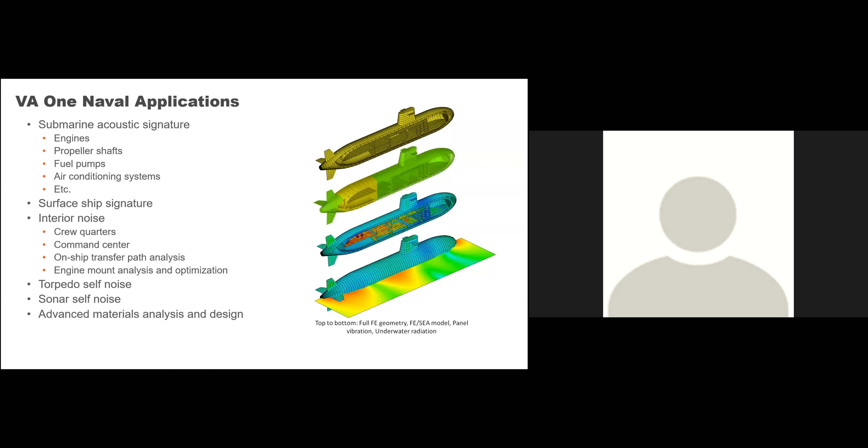As for naval applications, here we see more challenges and tasks. We deal with internal noises and the system of noise and sound insulation for different compartments, sound insulation for air conditioning systems and air ducts, but we also add tasks related to naval products, such as acoustic signatures of engines, rotors, and turbines. This is the surface signature of the ship, and also the possibility to identify this ship at a distance. So we reduce noises, and we also reduce its general signature.

How can we solve the task of calculating acoustics inside the ship? First of all, we need to have the finite element model or CAD model. If we do not have such a model, inside our software we have a special marine modeler, which allows us to create CAD models based on deck drafts and cross-sections.

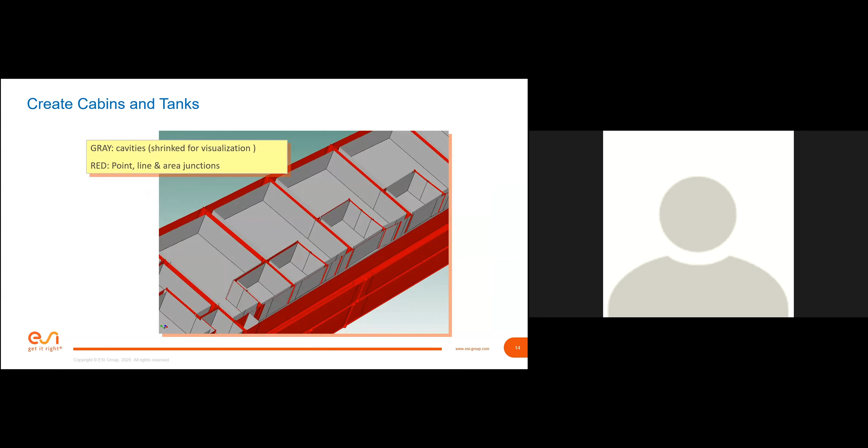These models can be uploaded in standard CAD formats. You can see what formats can be uploaded, and you can also upload a finite element model and use it for your analysis. Here you can see the division of the ship into different compartments and zones, with cavities shown in gray, and junctions and side walls shown in red.

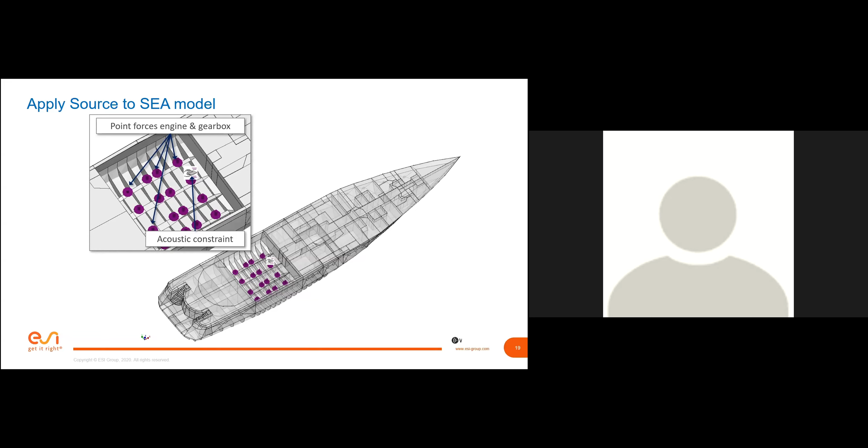We can have different options for the source. The main source is the engine, and to be able to model all the calculations, we need the finite element model of the engine support to understand how the noise will be transmitted. This finite element model is interpreted as point forces and acoustic constraints, and this energy is calculated on the structure of the ship.

We can take into account the water loading, which increases the mass of the ship. We consider water either as SIF, a semi-infinite space, or as just mass loading on specific zones of the outer skin of the ship.

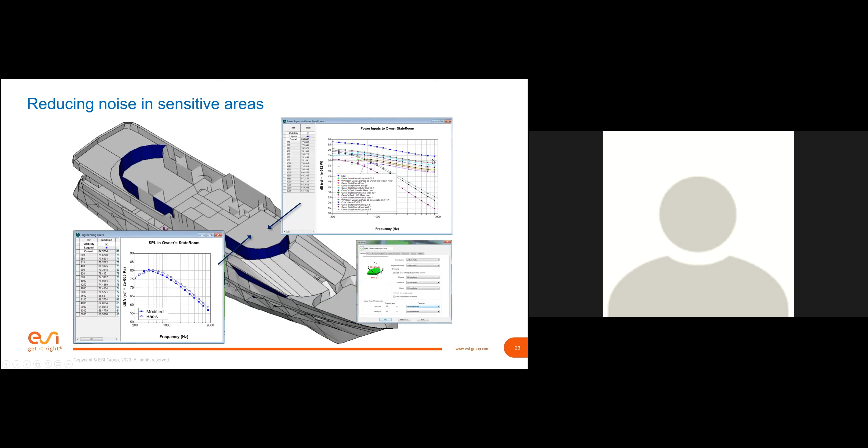The main task is to evaluate the paths of noise transmission and understand how the noise can go to the crew cabins, for example. The general level of noise is shown on the figure in blue, this blue line, and we also have different paths of transmission. So we analyze the most interesting paths of transmission, and they will be optimized afterwards.

We can optimize it with the use of noise-absorbing materials, or by increasing damping, or by increasing thickness. We can use different options of insulation materials, and we can just add insulation.

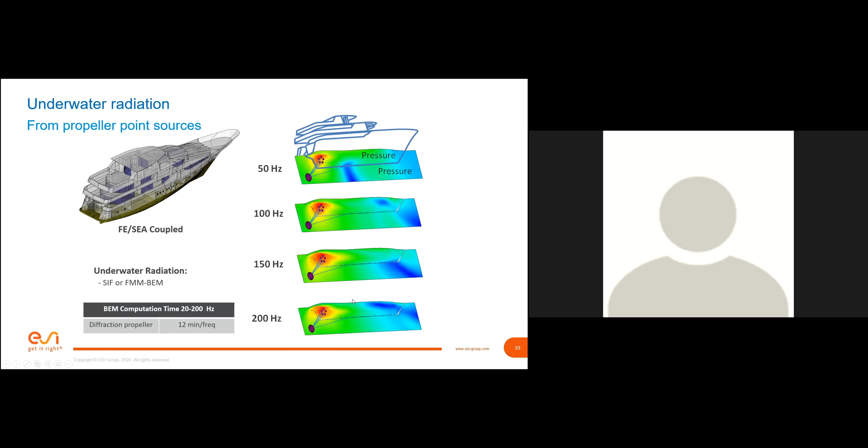This is the first part related to the internal noises. The second part is related to external noises. So from where we can transmit noises to the external environment. So first of all, this is the vibrating structure, the vibrating outer skin, and here we can analyze velocity and pressure under different frequencies. The second block is the screw, and locally we can analyze in each point what is the level of noise generated by the screw.

Except the determination of the noise level at a specific point, we can also look at the direction of this noise. So what will be the frequencies, the directions, and the distances of this noise transmission. And we also can evaluate with the help of the modal analysis how the structure will behave under different frequencies and how the noise will be transmitted at a certain distance.

And to conclude, I would like to show a number of clients which are using VA One solutions. It is used very actively in Europe, in the USA, in Asia. Our client in Russia is the Rubin company. They are manufacturing submarines. Well, unfortunately, their tasks and the details on their tasks are not available to us. If you want to receive additional information, you can contact them directly.

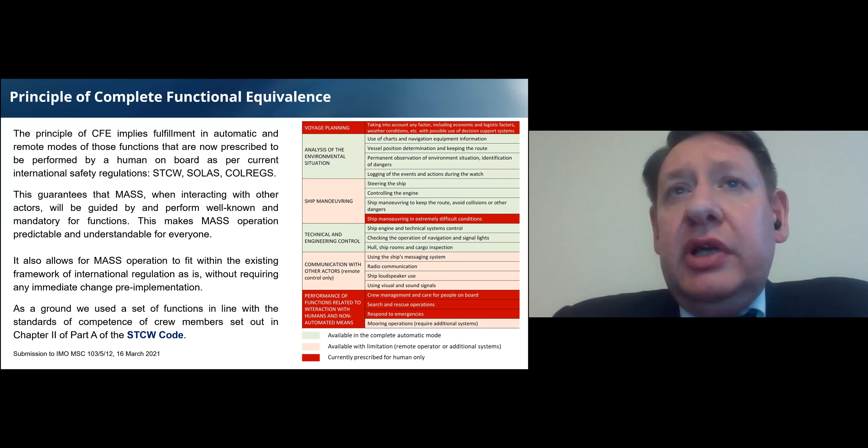On the one hand, this allows us to work within the existing safety regulation since we are compliant with its requirements. And on the other hand, it guarantees that an autonomous vessel interacting with other actors is guided by well-known and predictable rules and functions.

I will not go deep into regulatory. I would just say that we are actively working in the International Maritime Organization in the analysis and development of international regulations for MASS, and taking into account this work within the IMO, we have developed national regulation. This is the first in the world regulation for autonomous vessels. We have 3 levels. The first is a federal law explaining, interpreting legal aspects of maritime autonomous ships use.

The second is under law, including government regulations on the national experiment, which allow, as I said, to equip and to operate autonomous vessels under the Russian flag in commercial conditions. And the third level is technical regulation. First of all, these are recommendations by the Federal Agency of Maritime and River Transport on COLREGs application by maritime ships. Again, first time in the world, the Maritime Administration explained in clear algorithmic mathematical mode rules for collision avoidance.

Then we have also rules for classification of maritime autonomous ships and rules for cybersecurity issued last year by the Russian Maritime Register of Shipping. Also, as I said, we have developed a universal set of technical solutions. Universal means that we can apply it on any kind of vessel, and first of all on retrofit vessels. So we don't need any new type of vessel. We can upgrade the existing vessel to an autonomous one with this technology.

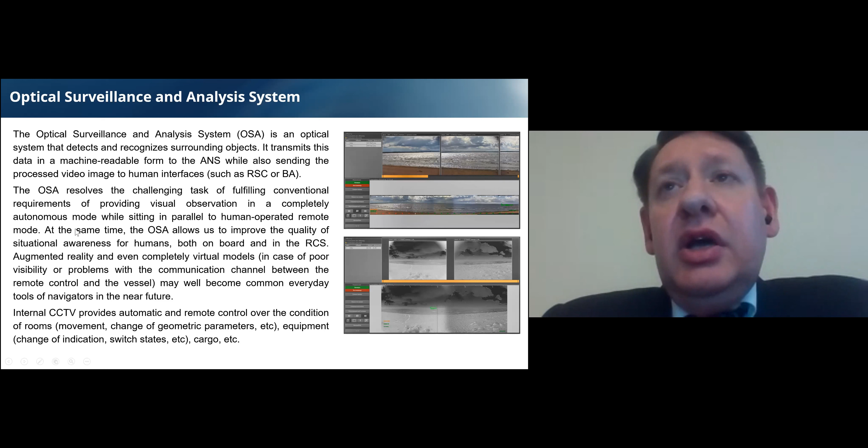The remote control station, you may see here again one of the video records of one of the trials in real commercial conditions, is something like the equivalent of a bridge, but outside the vessel. We have video screens representing the real-time video data with augmented reality, with metadata, which helps the remote operator to understand the objects around the vessel.

It has interfaces to all the systems, navigation systems, technical control systems, radio and messaging devices, and also a joystick system to directly control the vessel. In general, we are following an approach that different modes of control should be coexisting, the same as it was made during the MUNIN project, as well as described by the International Maritime Organization. So we are using the proper mode of control for the proper situation.

For example, in high seas, the system could work in standard situations absolutely automatically. In non-standard situations, it could be controlled by the remote operator, and in some limited cases, like pilotage, for example, it could be done by the crew on board.

Again, starting from September last year, after extensive simulations and tests in simulators, we started trial operation on board these 3 vessels. The first stage was just gathering and analysis of the data, so everything was working, but without access to actuators. In December, we got approval in principle by the Russian Maritime Register of Shipping, the first in the world approval in principle for autonomous navigation systems.

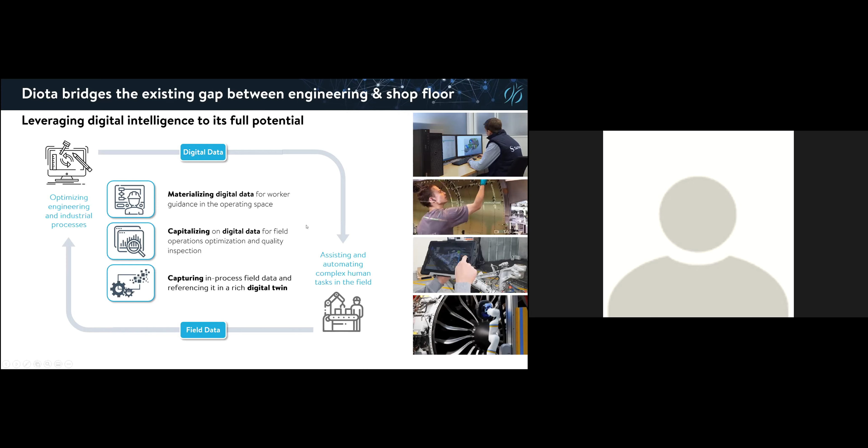With the solutions, we want to allow them to capture information during the different processes, to capture the field data and reference it with the digital information, the CAD models, the digital mockups, and other information to create rich digital twins that represent the reality on the shop floor, and provide this information back to the engineering so that the engineering can optimize their data and their industrial processes. That's the overall idea, and what it means is illustrated in this video.

Again, our solutions are particularly tailored for heavy industry and the data they use. We have a lot of experience in the maritime sector, but also the energy and aerospace sectors, providing very efficient solutions for the shop floor. First of all, we can connect to different information systems on the engineering side to allow engineers to use their complex CAD data or simulation data and visualize it with the right device in the right place at the right moment on the shop floor for the worker.

Here, the worker can see the interior of a cockpit through a head-mounted display. Or here, you can see how a worker in assembly is guided through a projection system to drill holes in this case, but we also use it to assist the assembly of bolts and rivets, not only in the aerospace industry, but also with different construction companies or naval companies.

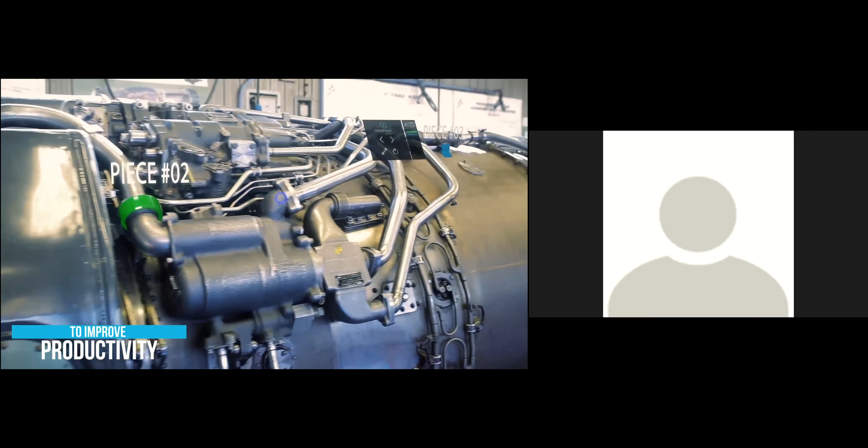Here is another example of a worker guided using a head-mounted display or a tablet during a maintenance operation on an engine, which is the engine of a helicopter, but this operation is very similar to operations with engines or complex equipment in the naval industry. And our solutions are also used for maintenance work on electrical components, for example.

Finally, the solutions are also very well suited for training purposes, to allow a faster skill ramp-up of workers on the shop floor with complex information. And at the end, all this data that is captured and acquired is particularly well adapted to be provided back to the engineering so that the process and data could be improved.

So here's an illustration of what I just described again. On the left side, we have the engineering department where all the data and procedures are developed and created. And on the right side, the field operations, which want to benefit from this data. And therefore, this data needs to be converted and manipulated.

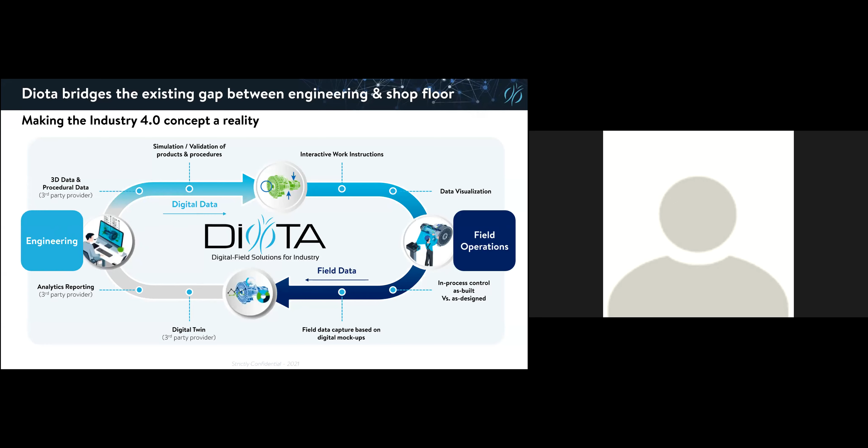Here a quick look into the different devices that our solutions support. So our software solutions are completely agnostic to the different devices, and this is because we want to provide the best suited device to the worker. So our software, the Diota player, can run on tablets, it can run on workstations, it can run on a projective system or a head-mounted display.

And this is because, for example, in a scenario where we want to assist a worker who's assembling equipment or assembling bolts or other parts, they usually want to have their hands free. And therefore, they do not want to hold a tablet or hold a camera. And so they can use a projective system to project the information, or they can use a head-mounted display to have the information immersively displayed to them while they have their hands free and can do their work.

However, for example, maintenance work, or quality inspectors especially, they prefer to use tablets, for example, or these cameras to be able to interact with the system, to obviously be guided with a step-by-step instruction, but also to be able to take notes, document, and to execute conformity checks and create very comprehensive reports of the build state, and then provide them to the engineering.

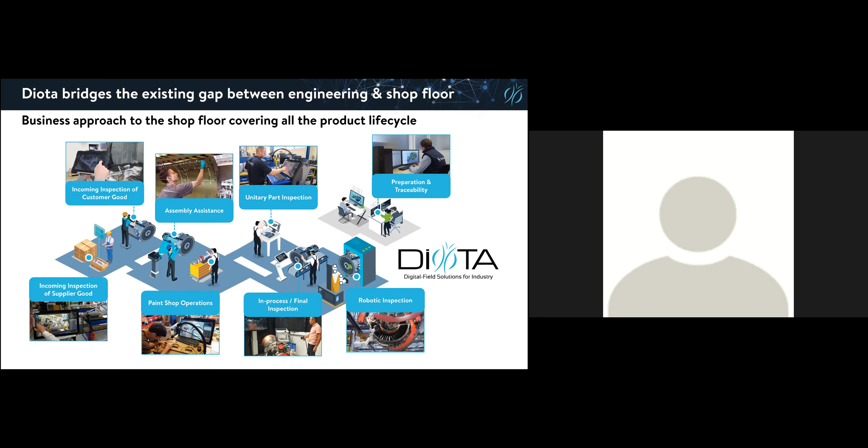And now a little bit more focus into the marine industry. Sebastian, yes? One minute. Okay.

Merci. Where our solution is used, for example, in the naval group to increase the quality and especially to reduce the cost of reworking. It is used to control pipes for different stages in the assembly of the construction of the boats, where the inspection time is reduced and they obtain improved quality.

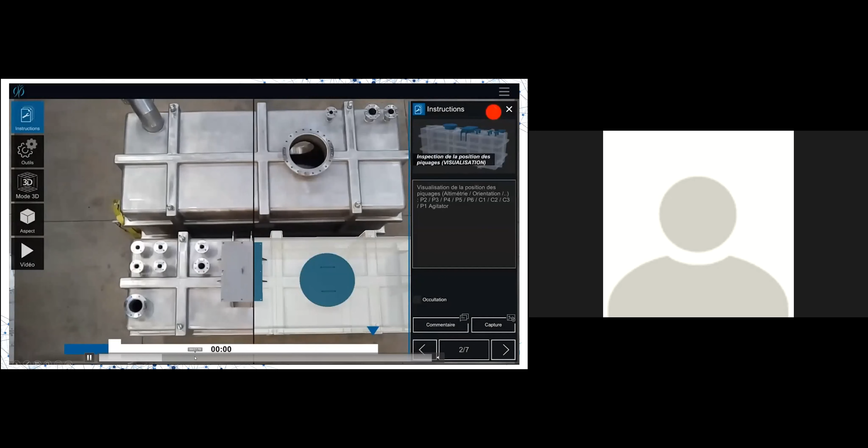And now I finish with a little video that is more related to energy, but we have very similar use cases in the marine industry, where vessels, pressure systems, seals or other equipment can be inspected and documented, and different elements can be visualized here, and the worker can interactively observe and compare the as-designed with the as-built state.

Maybe here, so another scenario of a vessel or a pressure system, or here inspection of construction, absence or presence of platforms, pipes, other equipment, and whether they are present or not.

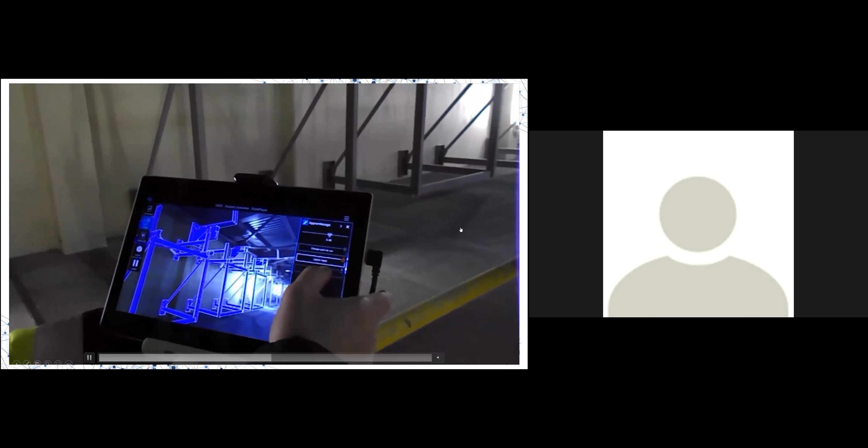And here there's a more interactive visualization, which is basically in a shipyard, where they will visualize and compare the installed systems with the as-designed scenario and document if it has been properly installed, and confirm and validate it.

So these are some examples on tablets, but here you can see another scenario with tablets. It's, I think, air conditioning equipment that is visualized directly on the construction site.

And here we are on another construction site with a HoloLens head-mounted display that interactively visualizes very different equipment, pipes, electrical components, electrical systems. It moves a little fast, but here you can see pipes that are installed, and the user can then see all that equipment in the right place and can confirm that.

So yeah, this concludes my talk. Thank you very much for your interest, and I can provide the slides afterwards, and I'm obviously available for any questions. Thank you very much.

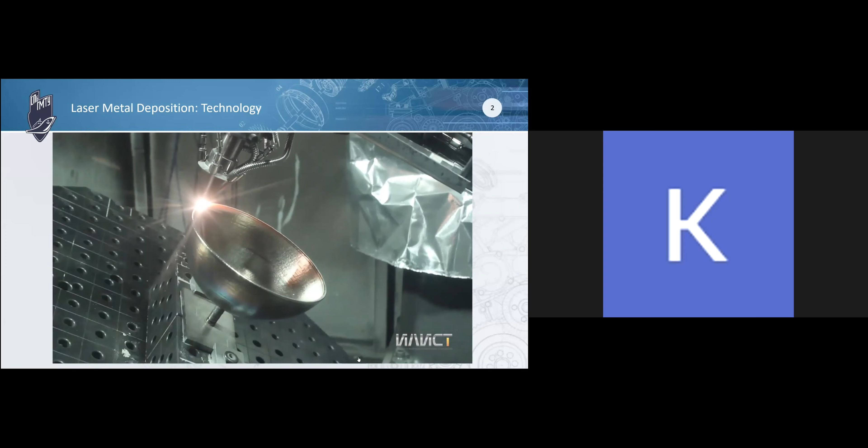So here it is, a video of this process. It's sped up, and the material we use here is titanium alloy, and a titanium sphere of 6 kilograms is built in about 8 hours.

In summary, our technology is developed for weldable materials such as steels, nickel alloys, titanium alloys, cobalt alloys, and so on. We have large parts that we can build on site. The maximum diameter for today is 2 meters with 1.5 meters height, with deposition productivity up to 2.5 kilograms with steels. And the key of this technology is accuracy, so we can make precise blanks, precise work pieces with minimal excess material for post-processing.

So we also develop technological equipment for realization of this technology. For example, here is presented our most basic machine. It was built for 1.3 meter diameter and 0.8 meter height, and we can produce parts up to 350 kilograms here.

This machine suits very well for most applications in the marine industry which we are faced with. So it's parts of propulsion systems, different pressure vessels, and so on.

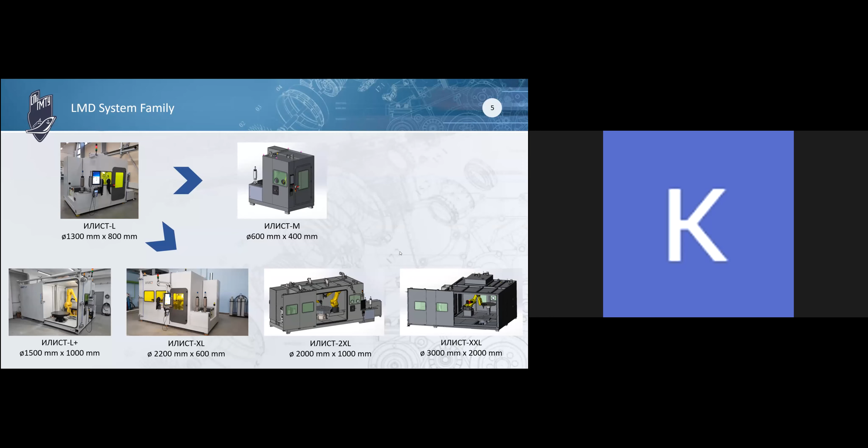When talking of materials, we use metallic powders to produce large parts, and today we are working with a wider range of different materials. When we're talking of steels, it's beginning from stainless steels, 304, 321, 316, and so on, and high strength steels also are used.

We use a lot of nickel alloys, which are heat resistant and corrosion resistant. We can provide different bimetallic parts. For example, the inside part can be made from steel, and the outside made with different materials such as Inconel or copper alloys and so on. Also, we're working with titanium and aluminum alloys, and different materials such as vanadium, molybdenum, cobalt chrome molybdenum, Stellite 6, and something like metallic ceramics when nickel-based alloys are mixed with tungsten carbide.

Most of our materials, we test them on site, and they show mechanical properties of rolled material or even better. It's much better than castings, but sometimes forging shows a little bit better results.

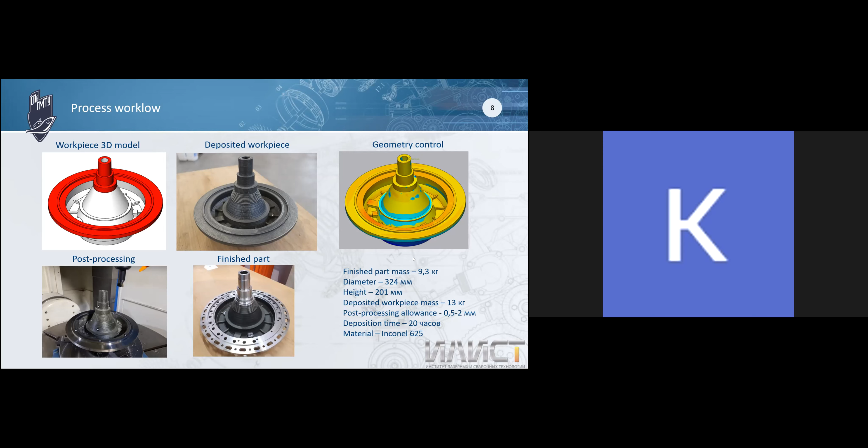When talking about the deposition process, deposition is a welding-based technology. That's why there are a lot of stresses induced during the deposition process. The key to producing precise parts is to simulate the stresses and distortion and predict them. Today we use Abaqus to simulate the process of laser metal deposition, and it gives us an opportunity to build proper, good parts from the first attempt.

For example, this is a titanium ring which has a diameter of 0.8 meters.

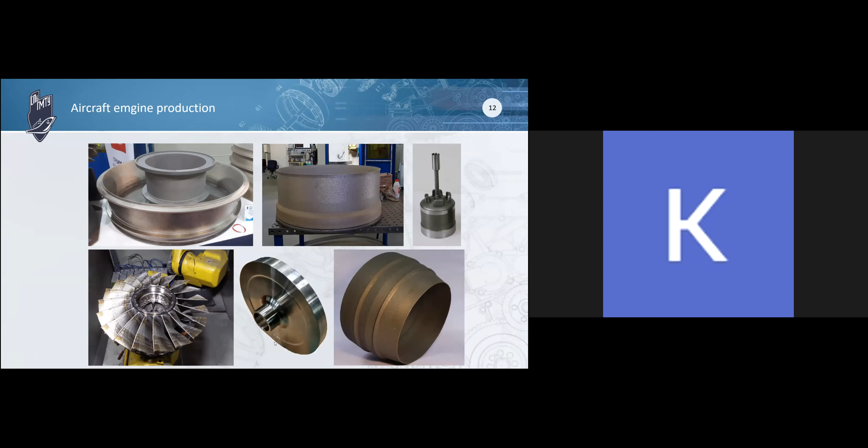And talking of different parts, we can produce titanium rings. We can produce different types of machinery equipment, stationary or rotary equipment. We can produce parts of complex geometry with cooling channels, coming into marine technology. We also work in a lot of propulsion systems. We use different materials - stainless steels, nickel alloys, copper materials - to make different types of equipment.

So this was a brief review of our technology and equipment. Thank you for your attention.

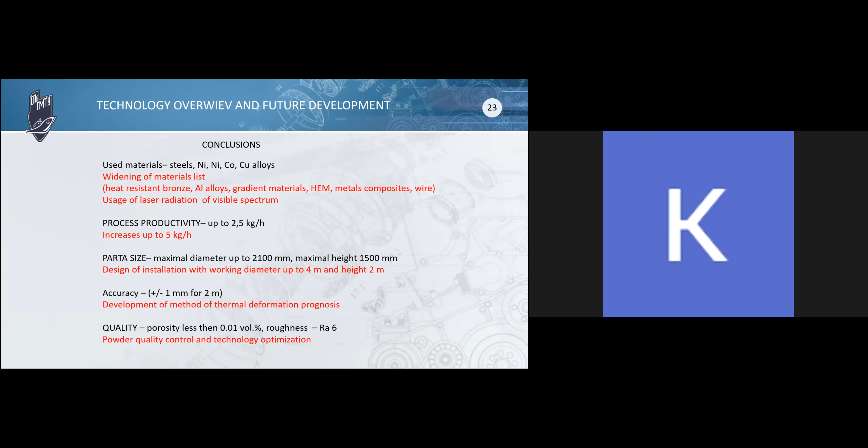Thank you very much, Konstantin. And for the French colleagues, please note that Russia is a major supplier of materials to France - titanium, aluminium, steel, and so on. And of course, we see in Russia a very strong tendency on the development of high-performance powder. I believe it will be a very beneficial cooperation project with our industry.

Thank you, Konstantin. And now we will keep the laser technology field and listen to the French company Meliad, and the CEO, who will introduce the innovative laser technology to optimize production and assembly processes.

Hello, good morning. Can you hear me first? Yes, okay. Thank you very much for the day, for the participation.

I will just share my presentation. Sorry, I do not find the right one. Okay, it's okay, just a few seconds.

Can you see my screen? Yeah, yes, it's okay, you see the presentation? Yes, okay. And I have 8 minutes or 15?

What is the time? Eight minutes, please, Jean-Michel. Okay, thank you, I have not too many slides, so that's okay.

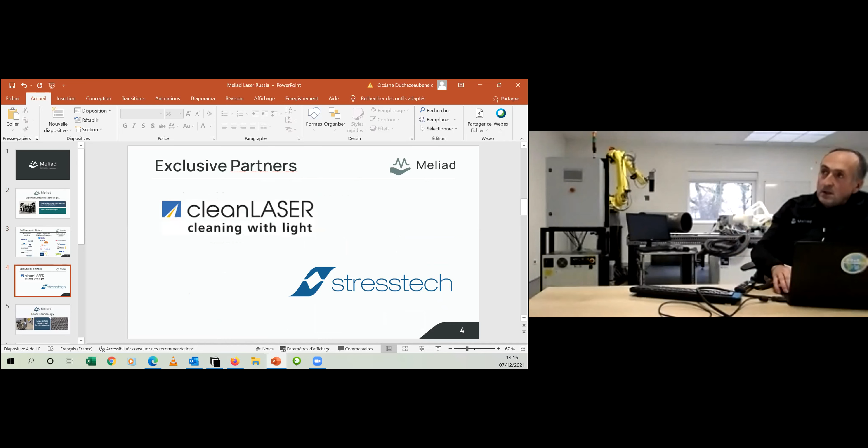We are doing some services for sure, and also we go all the way to the industrial solution for our customer, plus the robotization 4.0, meaning a fully automated and robotized solution.

And we also have huge business coming into nuclear decontamination, and also in decoating or surface preparation before and after welding - probably this is one topic we can offer to the shipyard industry.

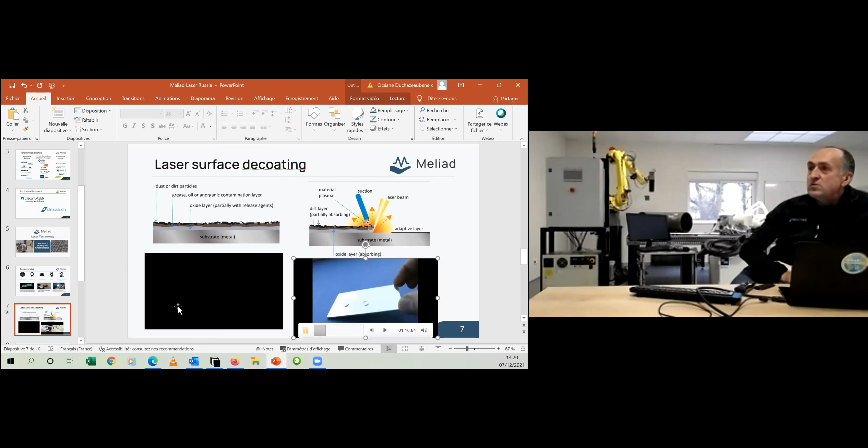I will start another video. If it works, sorry for that. This was a nuclear development we made. So sorry, I have some issues with the video.

Okay, we can follow. You can see here on the left some mobile units. So we have different kinds of powers, and the more power, the faster the process is. So basically, for each application, we decide to go with the best power and the best setup parameters. I think it works. Okay.

So this is the single process just to show you how it works. We have the single point that is focused on the surface, and then you generate a sublimation, and all the residues are always sucked during the cleaning. It means that during the treatment, you remove the coating, and also you suck all the residues. At the end, you have only a small portion of residues to retreat. There is no pollution on the surface.

So you can have post-treatment for laser welding. You can have pre-treatment, especially for shipyards, in stainless steel, in nickel base, for example, for submarines. We also have applications for offshore, probably for icebreakers in Russia. You probably have main interest in-house, inside the shipyard, for local cleaning before welding, for example, or repair. So I just want to show you manual application for decoating, de-rusting, and also automatic equipment.

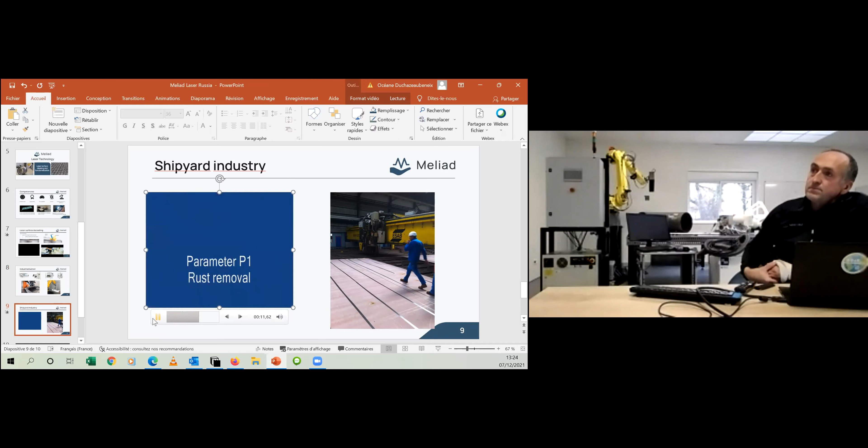Like that. And also we have in shipyards portable equipment to make local decoating before welding some stringers or some components, because everything is done, but during the design you also need to modify some drawings, and you need someone with the laser gun to remove the paint or the oxide locally and to weld the additional plates or stringers.

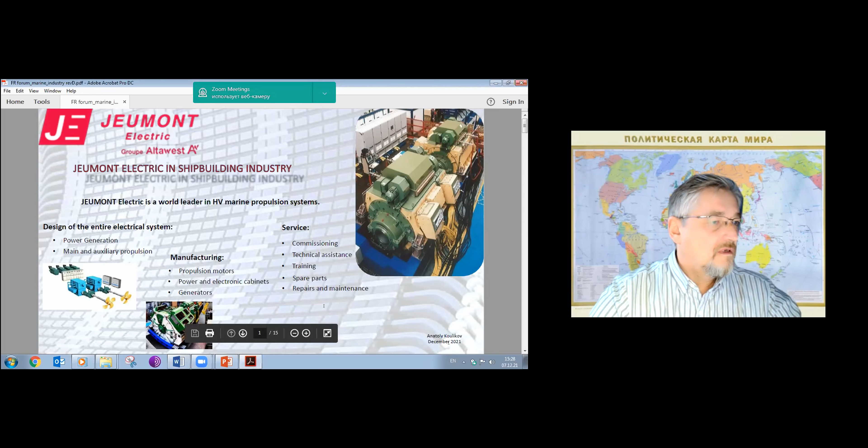Okay, how can I move it? All right. The history of Jeumont Electric. Is it moved? Could you tell me if my presentation is working or not? Okay, I hope it is.

The history of Jeumont Electric. As you can see, we do have more than a century of experience. One major milestone in our legacy is our belonging to Jeumont Schneider for some 30 years. During that time, we employed roughly 17,000 people, with more than 600 people in the Soviet Union alone. Jeumont Electric has a lot of unique equipment allowing machine manufacturing of highest quality, efficiency, and best TCO ratio. TCO is total cost of ownership ratio.

Here are some insights into our production and workshops in our France headquarters. In the lamination workshop, we have the laser cutting line, and the vacuum impregnation tank in the wiring shop. The tank has 5.5 meters diameter and is one of the biggest in Europe. The insulation made in the tank is qualified up to 20 kilovolts. In the assembling, testing, and balancing workshop, we have a huge balancing pit, able to balance a 900 megawatt rotor for a nuclear power plant in France. And you can see this in the picture.

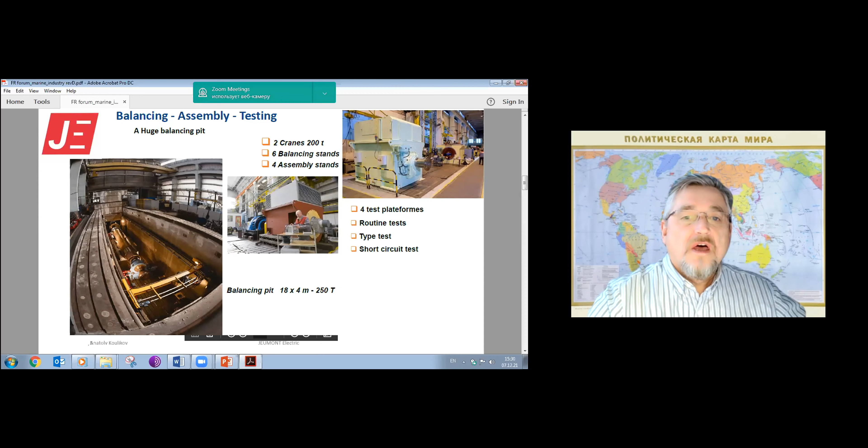One of our major developments in the past was the invention of Jeumont Electric Mactronics, a fault-tolerant, high-quality, discrete, multi-phase permanent magnet motor, which has positioned the company at the top of the electrical propulsion system market.

Our engineers are specialized in marine architecture, and they are often designing the complete vessel's electrical propulsion systems, HVAC drives, or generation systems. Based on those highly developed engineering skills, we manufacture specifically designed machines and equipment, such as main propulsion motors, auxiliary motors, or for bow and stern thrusters. As an example, main generation and frequency converters linked with propulsion motors. To complete our system integration approach, we are working with external partners and suppliers such as transformers or cabinets manufacturers.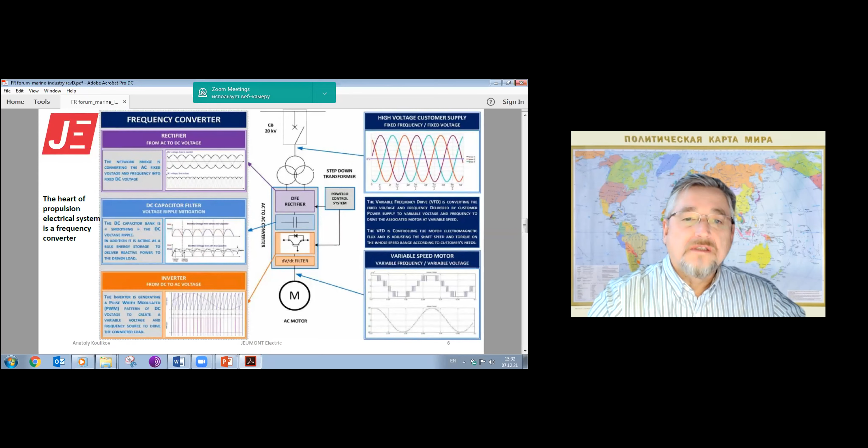The heart of electrical propulsion systems are frequency converters. On the picture, you can see three main parts of the VFD. Rectifier on the top. In this case, it is a diode front end. It converts the AC to DC. In the middle, you can see the DC link. It is a DC capacitors bank. It stores energy and smooths the DC voltage ripples. In the bottom, we can see an inverter section. The inverter is generating pulse width modulation patterns of DC voltage to create the desired frequency and voltage to drive the motor.

Most drives on the market are of the voltage source inverter type. However, the current source inverter topology is also used to better fit specific applications. Pluses of voltage source inverters: better dynamic performance, a simpler front-end design so it is more reliable, and the ability to connect multiple motors to one single drive.

Current source inverter pluses: well adapted to old motors, suitable for long motor drive cables, better protection against short circuit in the inverter. No fuses needed.

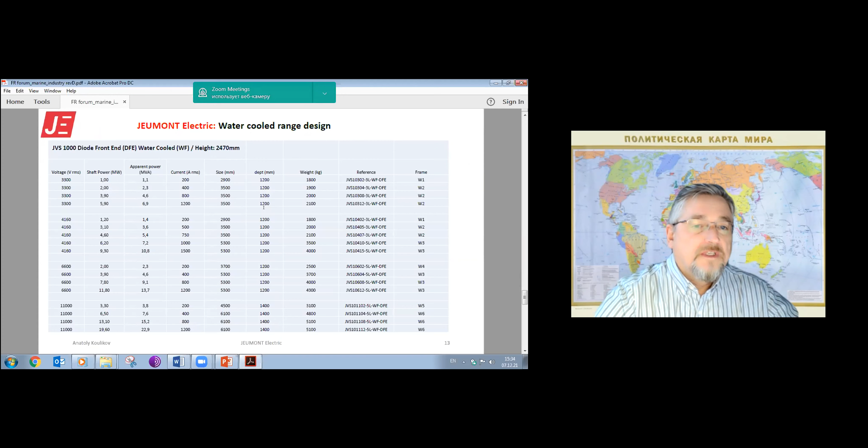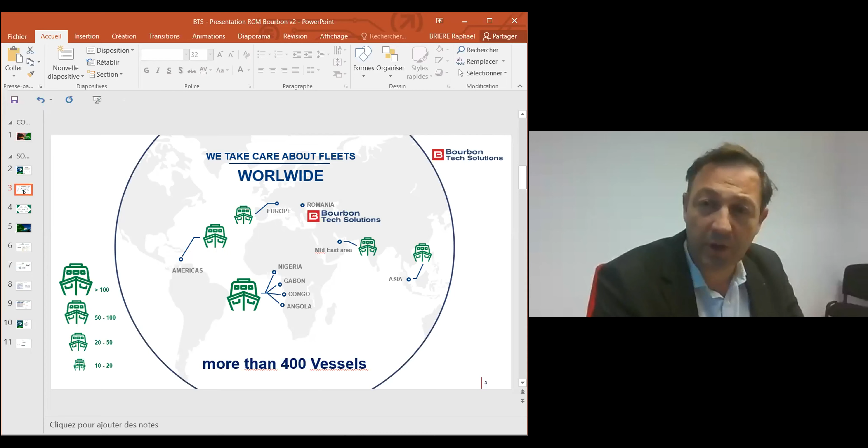So let me share a few words about our experience. At the moment we are supporting at technical level the fleet of Bourbon in particular, but not only, which is about 400 vessels worldwide, working for the offshore industry, oil and gas and wind turbines. In a few figures, we are 40 technical specialists. Most of us are quite experienced at sea already, with full field experience, especially on offshore vessels, and we have been involved in quite some docking projects and docking specification engineering and so on. That was the introduction of who we are.

Let me share the main topic. Dealing with this size of fleet, we are facing many challenges day to day. The first one is to increase reliability and availability of vessels. The second one, which is the most important, is to keep safety awareness at the top level, because safety is first. Then to reduce the cost of maintenance and technical, being the first cost center of the OPEX of a vessel, and to manage the risk on technical and operation. These were our four main challenges.

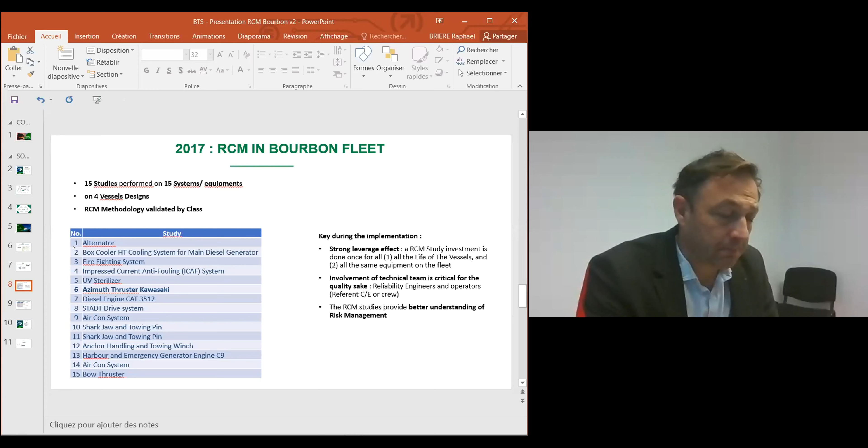So let me share a use case, because this is the theory. Now comes the practical. We have had the opportunity in Bourbon to drive some 15 studies on 15 systems, 15 equipments. So here is the list: alternator, box cooler, firefighting, azimuth thruster, and so on. These equipment were selected because they have strong leverage effects. That means that sometimes there is redundancy, so you do one study and you get two equipment or three or even more.

And most of the vessels have been identified because they are sister ships. So doing one study, with the leverage of the redundancy and the sister ships, we can have a great leverage impact. Our technical team has been involved and trained for sure, and it has been very helpful for us to understand and appreciate the risk of the maintenance that we are taking. So here is the system on which we have worked, and I can share the return on experience.

The studies were driven in 2017 or 2018, and now in 2021 we did the return on experience. I'm very happy to share with you that on three equipments we have made visible savings. The original recommendations were made in 2018, and now the vessel went to dry dock, and we were able to analyze the actual cost and make the comparison. The comparison is linked to docking services, shipyard cost, service engineer, and spare part cost.

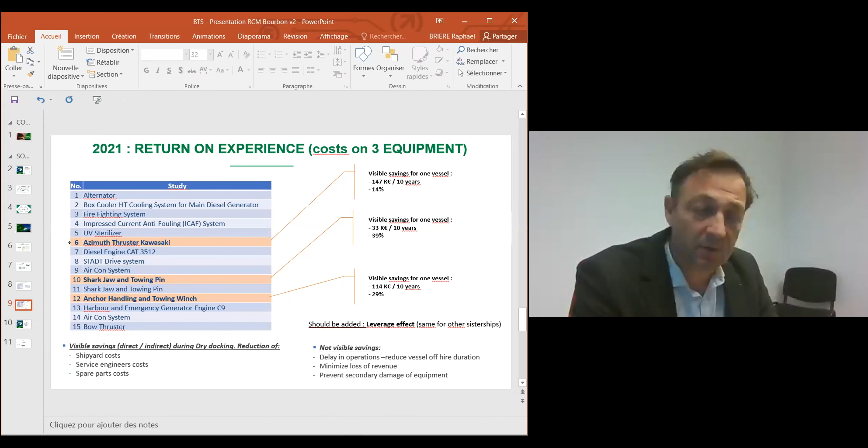So we end up with 14% of visible saving on one vessel for the azimuth thruster only. We end up with 39% for the shark jaw and towing pins, which is a small amount, 33K for 10 years, but still it's a big saving of almost 40%. And the anchor handling and towing winch is almost 30%, 29.

This is also to be added to the leverage effect, because we did this study on one single equipment, but for the azimuth thruster, there are several in the vessel, and there are several vessels in the fleet. So you can imagine the impact of the saving we did, while keeping the same level of reliability and availability of the vessel, and it was a great success for us. So we have driven 15, and we will continue in the next few years. It was a great benefit for us.

So as a summary, because I just focus on the key points there to show to you, so that it's clear and straightforward. It was a great benefit on safety, because everything has been reviewed. It was the opportunity for us to review and challenge all the maintenance plan, all the safety, and so to keep our safety awareness at top level.

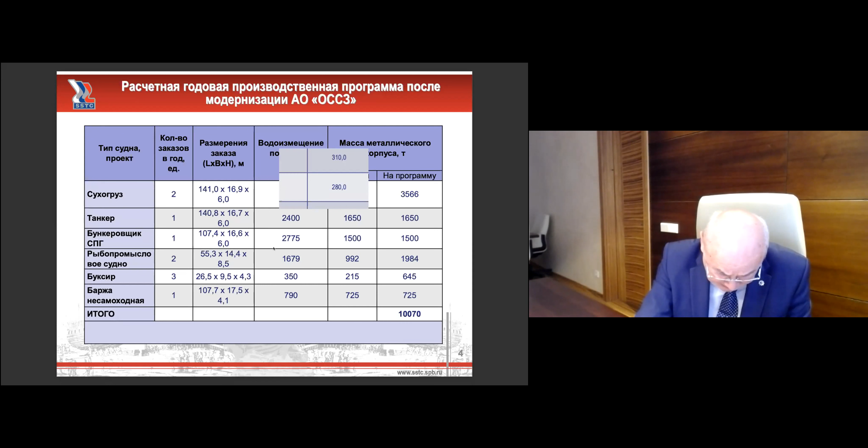As for principal technical solutions, we developed them on the basis of the production program for company development. We talk about type ships here, and the concept to create the digital shipyard was built around 5 main blocks. Firstly, a compact shipyard principle. The second principle is a transition from island automation to the integrated implementation of automated and robotic technologies.

We also created a compressor station and gasification station, as well as a horizontal shipway point. We also had documents to create painting and cleaning chambers, and to create an optimized warehouse.

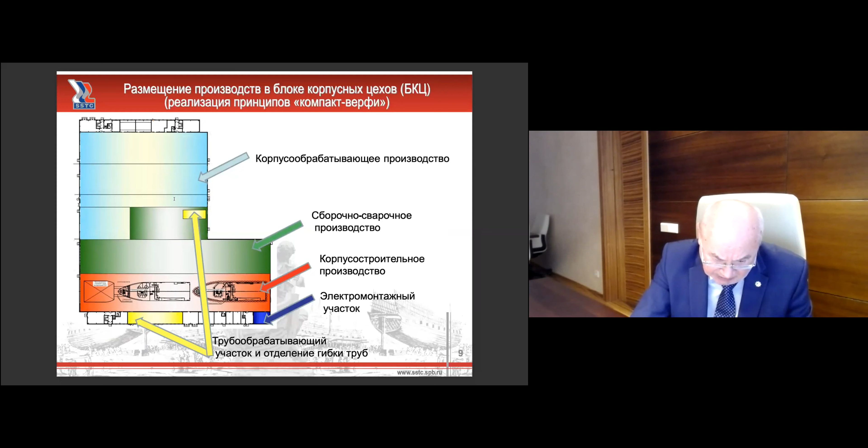We will assemble a warehouse of steel, a block for mounting pipes, pipe working, pipe bending section, and so on. That will help us minimize losses while transferring materials, and reduce the transfer of materials outdoors. So that will be 5 buildings, 5 sections inside one building.

The next block of the concept is to transfer from island automation to automated and robotic technologies that will be integrated. We would like to do this by automating the rolling station, and also automating the assembly and welding of hull structures.

We also want to introduce robotized lines, and install automated flat section lines. We also have to install laser equipment on the robotized sections.

We also have to install cranes that will be managed by radio technologies, and we will introduce automated cranes with magnetic drivers. The third step would be the integration of an identification system.

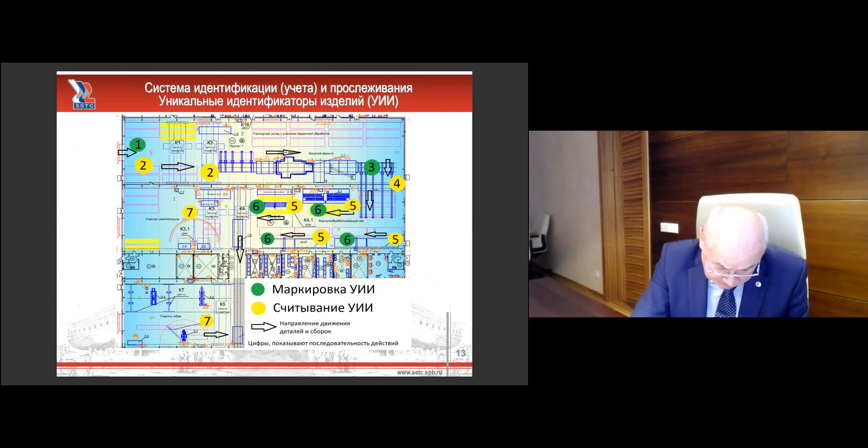This system will include automated imprinting for metals, pipes, details, and all the details of ships. We will label unique identifications that will be read while producing equipment. That will help us see the production process in an automated regime and minimize risks and human factors.

To reduce the volume of work with new technologies, we have to introduce some metrics. New optical technologies will be employed, and we will automate control operations with unique digital data for all the facilities and equipment under control. We'll also create optical equipment to control the transferring of technological elements.

One of the main dimensions of our work is to create a complex digitalized system to plan and control the whole system on the basis of the most advanced digital solutions, developed by St. Petersburg University. We will create a digital shipyard integrated into the information system of digital production.

This aims to create solutions for data processing, for technical planning and management, for management and engineering of electronic documents, for management of the enterprise, and so on.

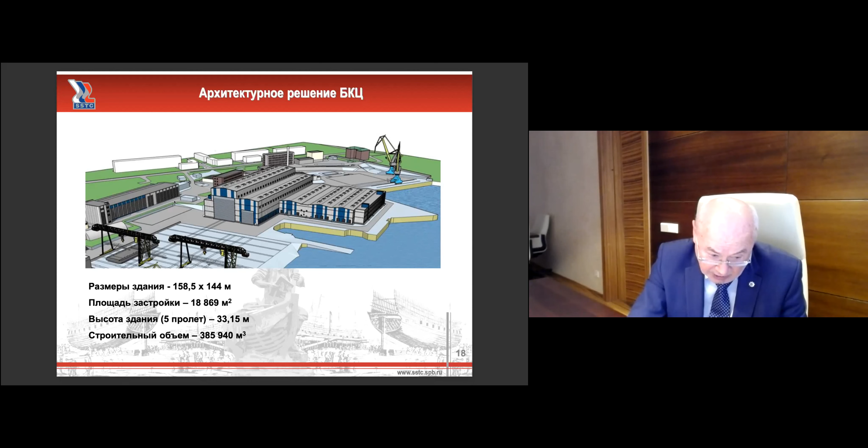We will also install the architectural solution that we can see, and this project will help create, in the northwest of Russia, a small plant that will be a very modern shipyard, producing not less than 10 ships per year and treating about 10,000 tons of steel annually.

We will increase its workload up to 400,000 cubic meters. It will be efficient and economically interesting. Last but not least, this project is already being implemented, and we will finish it in 2024.

We will increase the level of this plant up to the leaders in shipbuilding, and we will be happy to share our technologies with other Russian and international plants. Thank you for your attention.

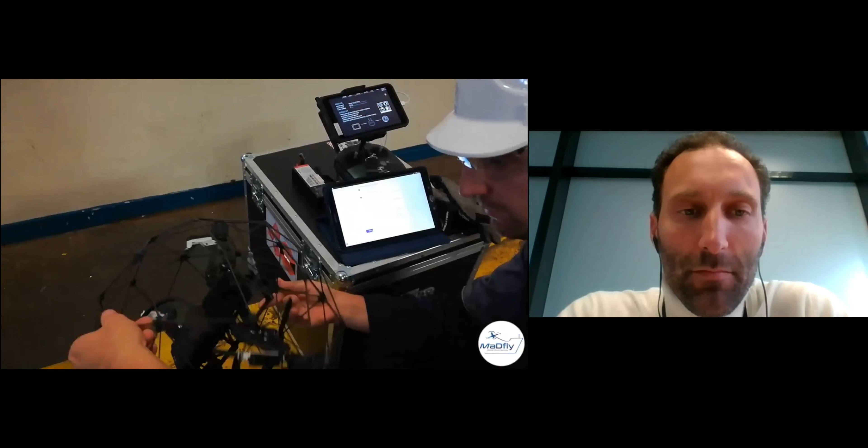So the video is showing you an indoor survey. We use a drone that is developed for that. You see there is a cage around the drone that enables us to go inside. So we have to check the drone first to be sure it's in good condition and that we will not have any problems.

We just have to open the void or ballast, and we can go inside. That's in a situation where normally we need a lot of people to go inside in case there is a matter. There the drone goes inside directly. We open, we go. On the left, we see what the drone is seeing.

We can take pictures of the problems or issues we see during the survey, and we can put that into a 3D model, for example, and compare from year to year what the follow-up is on all the issues we have.

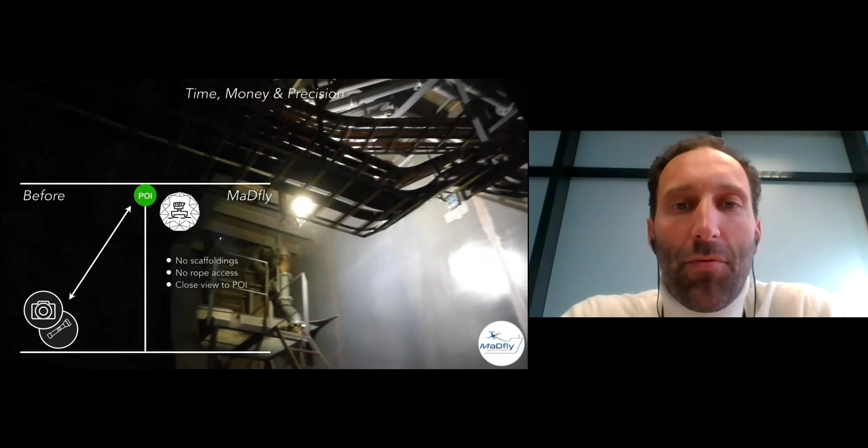Before, the way we were doing it, we had to open up, breathe the air and change the air inside, and we could go in, but from the very bottom, and take pictures, or we could build scaffoldings, or use rope access, or other things.

So the drone here is very easy to use. We just open the box, open the ballast, and we go inside. The people stay outside of the ballast tank, for example, and we can inspect. So we can do the follow-up and show you what we can achieve with all of that. So I'll come back to the presentation.

So we are qualified by all the main class societies. We selected the main six class societies, and we went through the whole process to get the qualification. So we are approved by all these class societies.

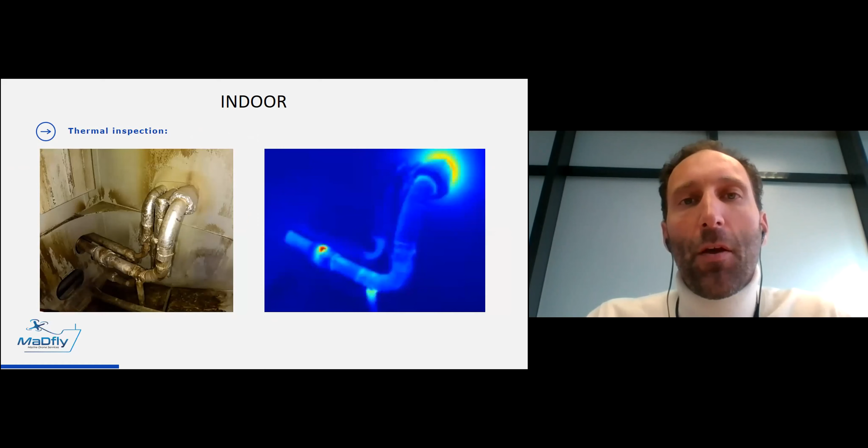Here on the left, you can see we have a pipe and some water and we are able to inspect it. We can do thermal inspection also inside. We can do photogrammetry, 3D modeling of what we are inspecting. It may be useful when you don't know exactly the shape of your assets, and you can redefine a 3D model.

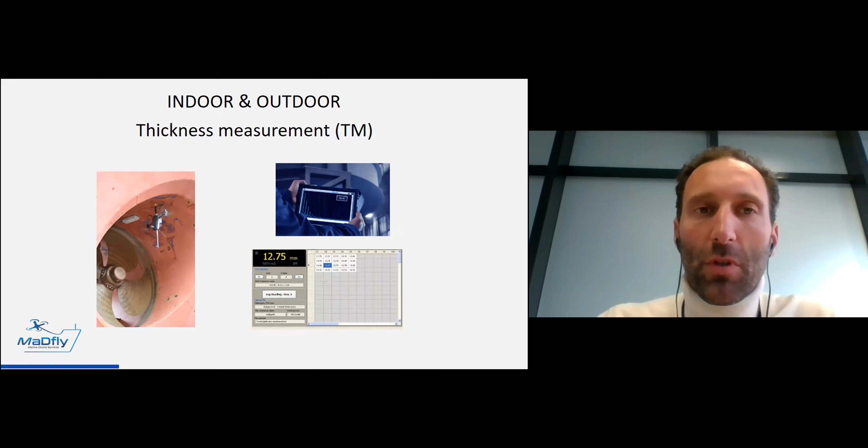Like I said, it's very quick, but it's to give you an overview of what we can do. Outside, for 4K video, exactly the same. HD pictures, we can inspect cranes, wind turbines. We can inspect a lot of things, in fact. Thermal inspection, solar farm, for example at sea, and we can inspect all the thermal expenditure that we have on an asset.

3D modeling, we can do it inside, indoor, in confined space. We can do outside. Coastal surveillance, that's also what we can achieve.

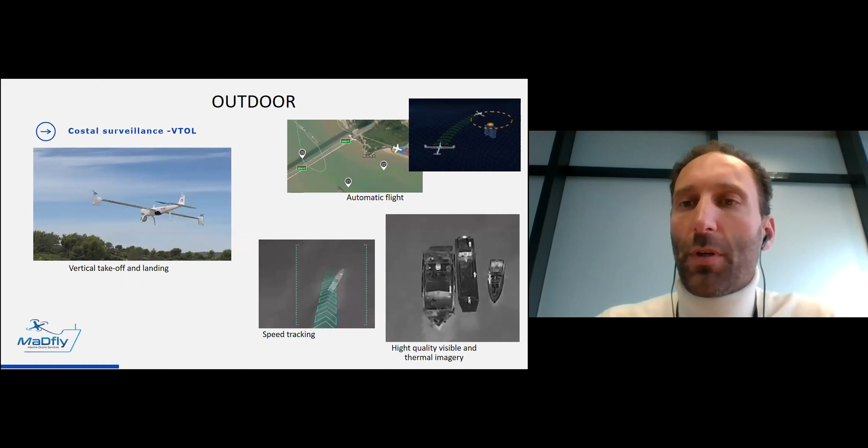There is a VTOL, meaning the drone can take off vertically and land vertically, but after it's flying, and you can fly for 2 hours, follow people or targets. You select the target and the drone follows it. Also, when you have sensitive sites that you want to follow up, there are autonomous flights. When something is happening, just push a button, the drone goes, and you get the video back live.

And that's it, a quick overview, because the time was short. If you have any questions, don't hesitate.

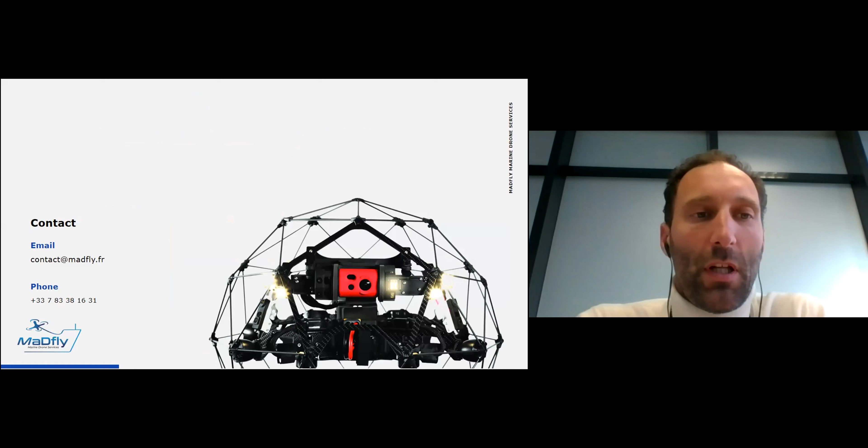Thank you very much for showing us how we can use drones in shipbuilding and for all the life cycle of the vessels.

Very interesting. And now we will go a bit more to the north of St. Petersburg to focus on the Arctic regions, a new strategic area of Russia, and the development of the Northern Sea Route, which can bring a faster maritime route for the global world.

So our first speaker is Sylvain Faguet, the Chief Sales Officer from the D-Ice Engineering Company.

Good morning, everybody. I think you should be able now to see my screen. We can see it. All right. So I'm Sylvain Faguet, the Chief Sales Officer for D-Ice Engineering. Thanks a lot for the opportunity to present our activity today.

D-Ice is an engineering office based in Nantes, created in the beginning of 2015, so quite a young company still. Our main ambition is to work on developing and producing clean energy, to reduce the greenhouse emissions of shipping, and to improve the safety and performance of ships at sea.

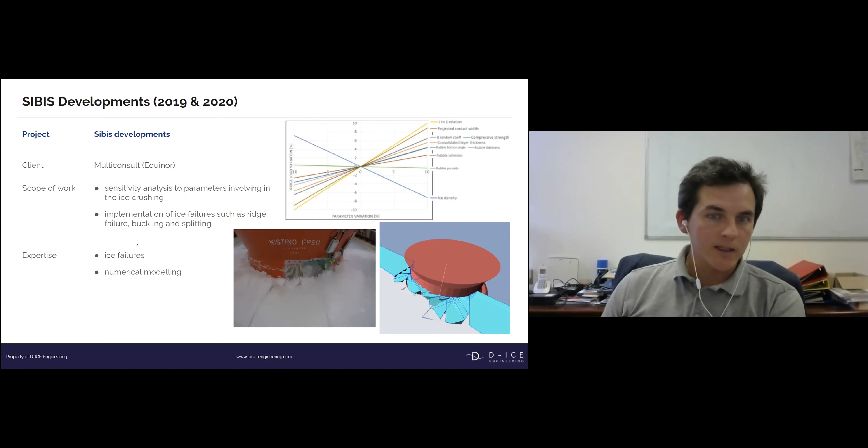Another topic that we have here is weather routing. We have developed our own weather routing algorithm. The idea here is we need to route a vessel from point A to point B, taking into consideration the wave, current, wind, all the environmental aspects, but eventually also ice and high sea. We also work on a model of the ship,

because at the end, the goal will be to find the route with the best energy efficiency, respecting the voyage duration, the ETA constraint that we might have. Indeed, we want to take all the operational constraints into account: restricted areas or high density traffic areas, or other constraints more linked to the behavior of the ships. For example, we don't want the ship to roll more than 10 degrees. So the solution that we selected is a grid-based approach in order to do multi-objective optimization, which is very flexible and highly tolerable.

So we use the algorithm in different ways. We have developed and put on the market an online statistical weather routing tool, which allows ship owners, naval architects, or wind propulsion developers to run their own statistical weather routing studies in order to assess the benefits of a wind propulsion system on a ship. This was used by different well-known projects in France, the Canopy project or the Navale project.

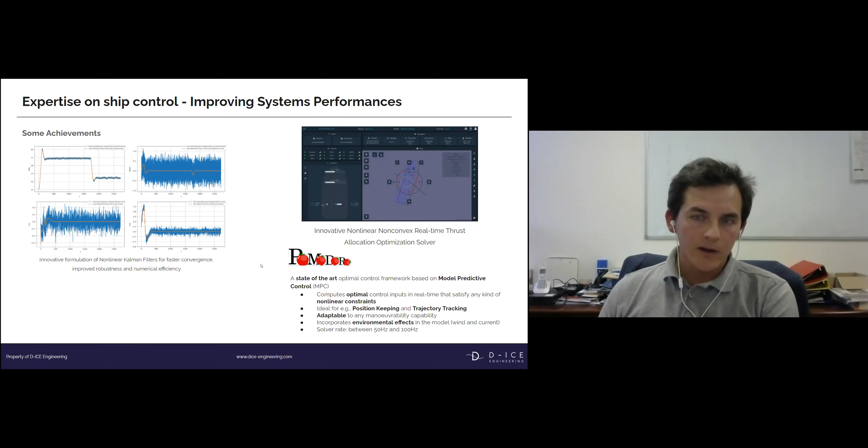So all these expertise, we gather them in our navigation system, Oceanics, which is really a cutting-edge system for the bridge officer. The idea was to bring together all the modules that the bridge officer would be using for navigation: route planning with weather routing, the ECDIS, which is the electronic chart display system, and of course the autopilot or dynamic positioning if we have such type of vessel. All this is embedded in marine grade hardware, and we have DNV and BV certification for the whole system. The idea is really to propose a cutting-edge system to the mariners.

And we had our first success for System Oceanics. We sold the first system to the vessel Canopy that will transport the Ariane 6 spacecraft from Europe to French Guiana for the launches. We also sold our system on a small buoy tender in France, and we have a partnership with the company Neptec, which won a call for tender to put two shuttles, one in Paris and one in Marseille, for the next Olympic Games.

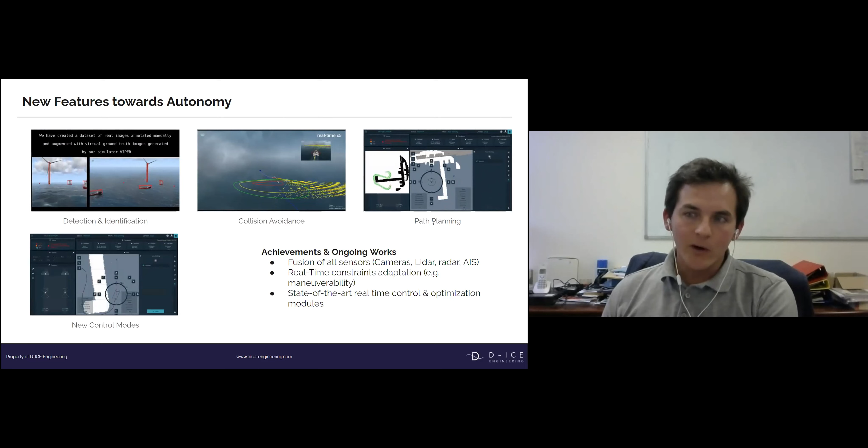We also have some research topics ongoing to go towards autonomy at sea. The idea here is to improve operations efficiency and effectiveness, and to reduce the carbon footprint of the vessel. We have some works ongoing on the detection and identification of obstacles, and then the right control strategies to avoid those obstacles. And more locally, we are working on automatic docking of vessels.

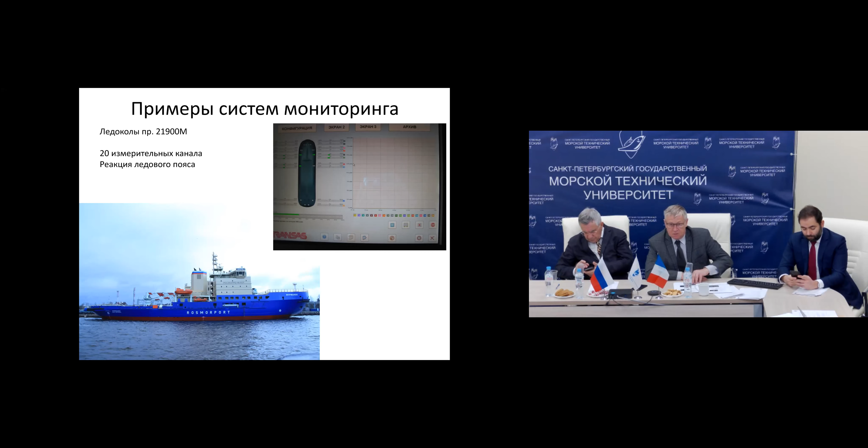And these are the monitoring systems for ice strike. Here you can see the figure on monitoring systems for the ships I've described. 3 of these ships are research ones, and the last one is the exploitation system, which allows the ship manager to regulate the speed of the navigation in ice waters.

And now we will proceed and talk about shelf sites. We need to talk here about the platform Prirazlomnaya, which has a great number of accelerometers, seismic accelerometers, so they are very sensitive and they react to the movement of the platform. It also has different inclinometers, for example,

and also the sensors to measure the pore pressure of the soil. 18 sensors located under the platform, and they show the measurements related to the bottom ground. And this platform also has 42 sensors for deformation measurements.

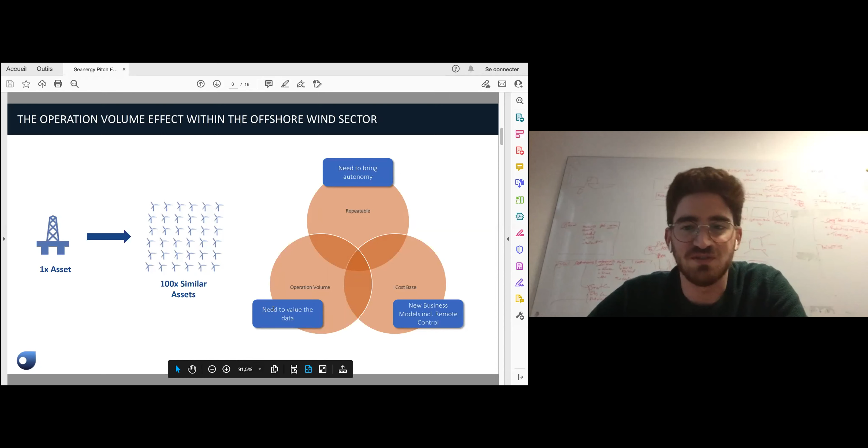And clearly, we are all coming from oil and gas markets where we had large and quite complex interventions, whereas offshore wind brings the opportunity to repeat the exact same intervention on several hundreds of monopiles. So there is a market opportunity for autonomy, of course, and robotics, for data valuation, but also for new business models.

So what is subsea inspection in offshore wind farms? So basically, once the field is built, you need, of course, to maintain the field. And you have 2 types of maintenance. The key maintenance is at the top of the turbine. But approximately 1/3 of the cost is what we call BOP, balance of plant, and it is linked to the subsea inspections. So we estimate several days per year for every structure.

So typically, we need to perform cable surveys between the offshore wind monopiles and visual surveys. And this is exactly what our ROV can do. And you can see once you do one intervention, you can repeat it every time on every turbine. So repeatability is clearly the keyword.

And to perform such intervention, we developed one of the most compact ROVs in the world, very well adapted to offshore wind sites. So it's compact, it is smart. So the ROV is tethered. You have a communication link all the time, but you have the ability to repeat the exact same intervention because it behaves like a drone. Everything is pre-programmed, and the ROV knows where it is, and it can navigate autonomously.

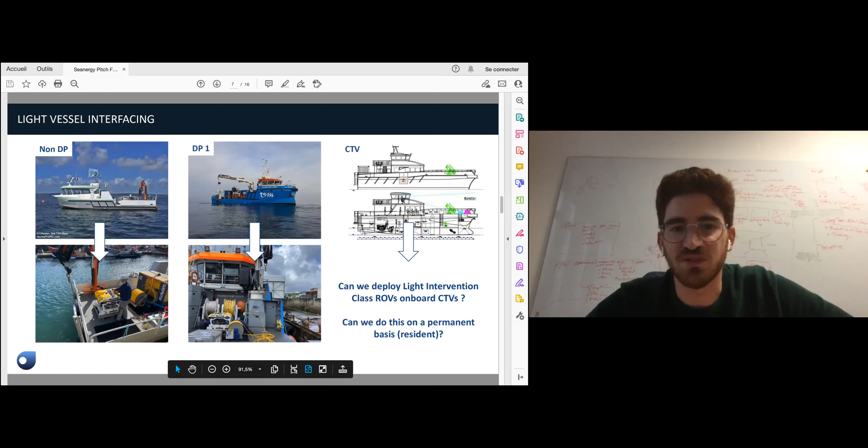And to do so, and this is one of our key added values, is the ability to supervise the operation in real time. And this is why our keywords are smart and remote. To us, there is no remote supervision if you don't have any intelligence on the ROV. And why that? It's because you have latency and communication loss between your onshore control center and your offshore operations.

So if your vehicle, which is subsea, is not able to behave by itself, or at least with the remote supervision capability, you won't be able to take the remote control. So we provide these kinds of stations, and we develop the entire software suite and network suite as a plug-and-play device for your vessels.

And an example, this is what we performed last summer in the North Sea. So it was an oil and gas site this time. So we managed to inspect several subsea templates, so subsea Christmas trees. So for oil and gas, those production wells, and we inspected all the infrastructures at 500-meter water depths in the North Sea.

All the waypoints were pre-programmed, but we had in real time the remote control link with a few milliseconds of latency. So we had pilots and inspection experts on the shore supervising remotely the entire subsea operations.

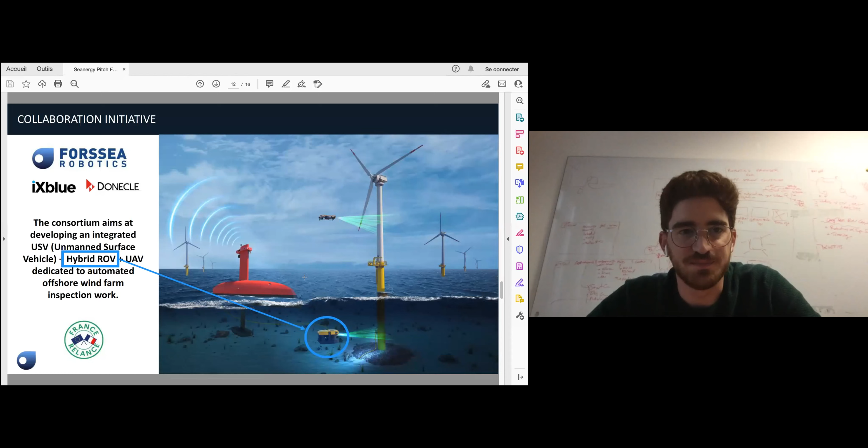And finally, I wanted to say a few words about what we are doing in machine vision. So we have a computer vision team here in Forssea. So we have the ability to track assets in real time. And at first, we developed this QR code tracking technology for subsea applications, especially subsea docking applications. But we recently released a product which is interfaceable to any subsea system or any machine.

And we are working with oil and gas, defense, nuclear, civil engineering industries to track subsea assets in real time with a very accurate positioning feedback. And our system is easily interfaceable to any construction supervision software.

And we have a qualification as we speak with the French Navy to validate and qualify the QR code system for dynamic positioning of vessels. So it's still under qualification, but the idea would be to have a QR code mounted on anything, and you could position your vessel in real time relative to the QR code. So it could be quite a nice to have and powerful tool for light construction operations.

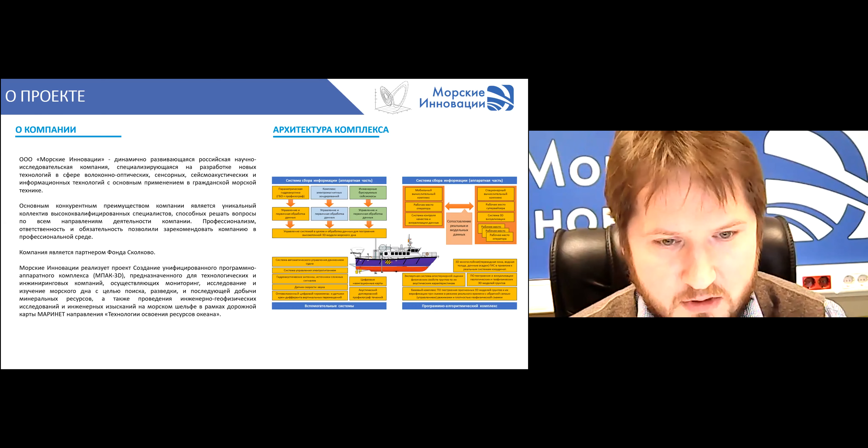What about the usage of such systems in the northern regions? It is even more topical because we are going to regions with long maritime routes. These are regions with big changes in flows, different volumes of sedimentation, etc. So the complex is made out of 4 systems.

Each system can solve its own task. The possibility of their integration allows us to solve all these tasks at a new level. These are the tasks related to bottom topography, tasks related to the maximum distance from the ship on the port hand and on the bow side, and tasks related to the identification and search for geological and anthropogenic dangers and threats,

and also tasks related to the control of dangerous objects, unpredictable dangerous objects. For example, the temperature is going high in the Arctic, and thus we need to control different unpredictable objects.

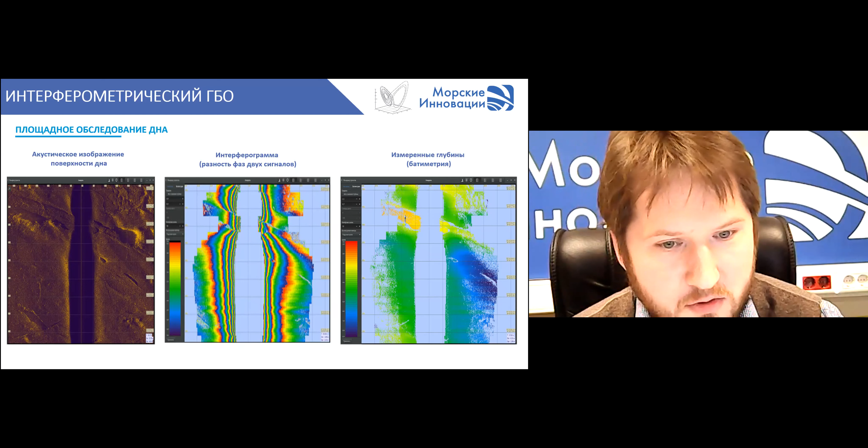The first system is the interferometric side scan. We are now able to work with these systems at a practically ideal level, and we think that these systems are competitive with other types of multibeam echo sounders, because this system is simpler. On the technical side, it is more reliable at low temperatures, it allows us to solve the main tasks, and the operating conditions give us better results.

Just an example of comparison of works we made in the framework of tests using a multibeam echo sounder. You can see that our solution is not worse, at least, and it can solve the needed tasks.

Another system is the broadband side scan sonar. In different conditions, in rivers, in ports, we sometimes need to have more control, and to better control the seabed, we need to have a better swath. Very often there are big changes in depth from several meters to dozens of meters. And if we also have wind action and different mistakes in maneuvering, we can provoke an emergency situation, for example.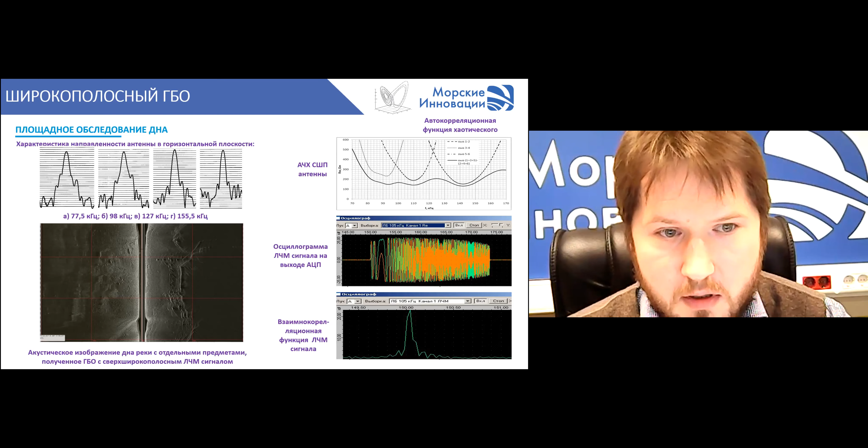And when we need to make images, it is easier to use such systems and not to spend a lot of time, especially when we talk about Arctic regions and when our operating time is limited.

The third system is the parametric side scan sonar. Its task is to identify the underwater structures, and we are now talking about geological issues: the gas infrastructure and the permafrost. With those two issues, if we have different distortions of the structure, some elements can go to the surface, and it can decrease the density of water, or it can cause a fast process of icing.

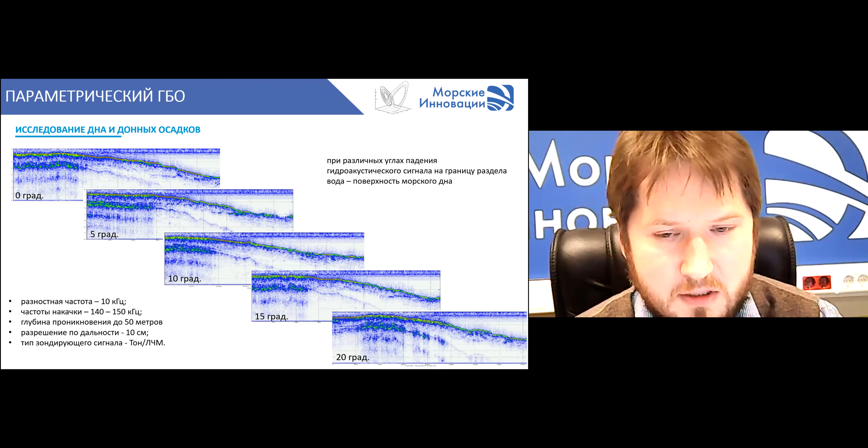So this system allows us to have different cross sections of bottom sediments and see if the situation is safe, or whether we need to implement some works to prevent dangerous situations. You can see on the slide that we have gas which is going out to the surface, and so it can be dangerous for navigation.

To get more accurate information, as all these sediments have a very good possibility to disseminate the particles, we need to get very accurate signals to understand what we are working with. Are these light sediments? We have examples of such processes, for example sediments of the height of practically 5 meters, moving practically 20 meters in one day. This impacts the form of the seabed and the navigation process.

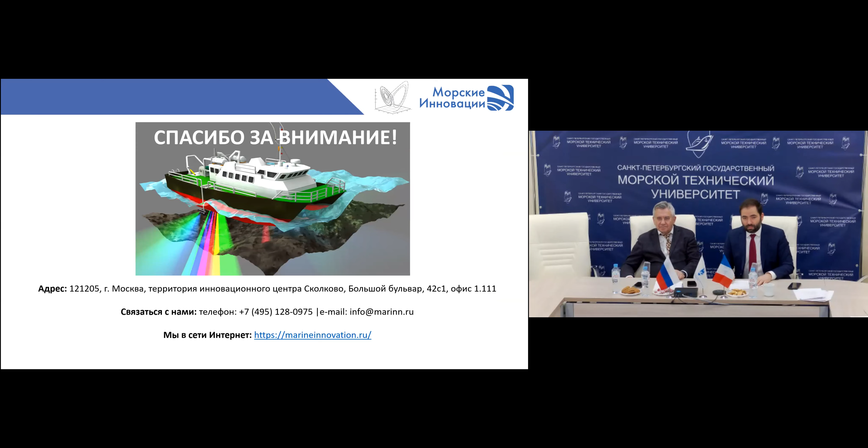That's all for me. Thank you very much. Thank you for your attention. I am ready to answer your questions.

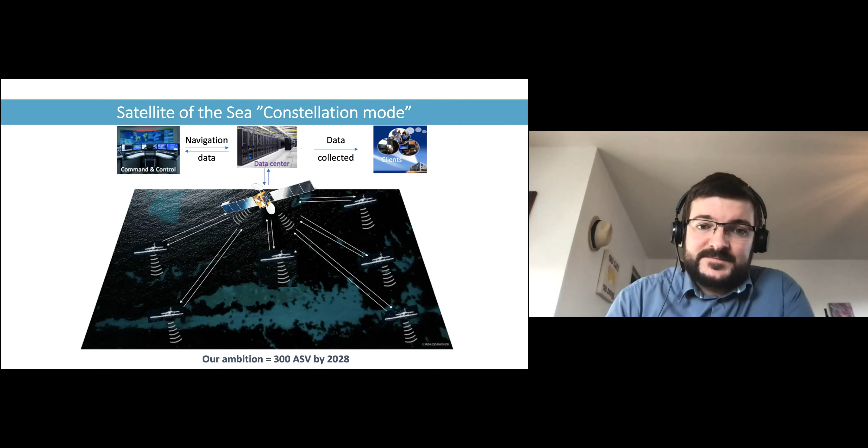So today we are collecting more than 50 different types of data. A few examples: we are collecting a lot of acoustic data, with different technology around that. We are collecting pollution data, like oil pollution, radioactivity, microplastics. We can do photo, video, of course. We can collect parameters around topics like meteorology data, bathymetry, things like that. It will depend on our customer, and we can integrate different kinds of sensors on board, depending on our customers' needs.

Our business model is not to sell the boat to our customer, but to sell the data we are collecting. Again, it's a business model inspired from the space sector. So we are selling this data through a big data platform we are operating. But the thing is, we don't want to do all the analysis part of all the data we are collecting, so our customer needs to have the skills to do that, or eventually we can also find different kinds of partners to do the analysis of our data.

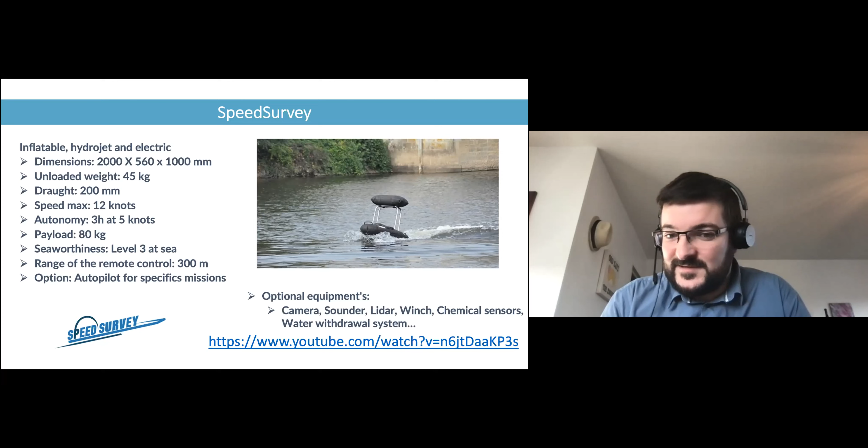So that's our three different projects. If you want more information, I put some links here to see the drone in operation. Thank you, that will be all for me.

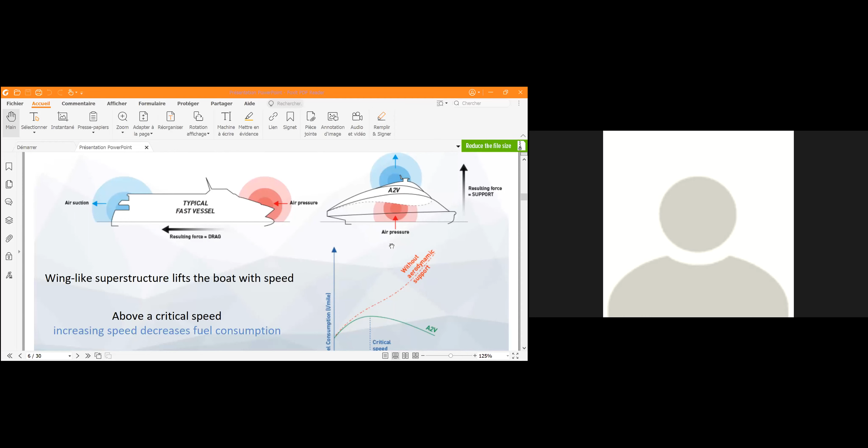We use, basically, a plane that never takes off. The idea is to use a wing to alleviate the vessel. In this picture, 80% of the weight of the boat is carried by the superstructure. So we use air to alleviate the vessel instead of fighting against it like a conventional fast vessel. Above a critical speed, we have a reduction of drag with increasing speed, unlike conventional vessels whose drag typically grows quadratically or cubically with speed. So we developed a lot of design tools in high-speed aerodynamics, and also unsteady aerodynamics, to qualify the vessel during the design phase.

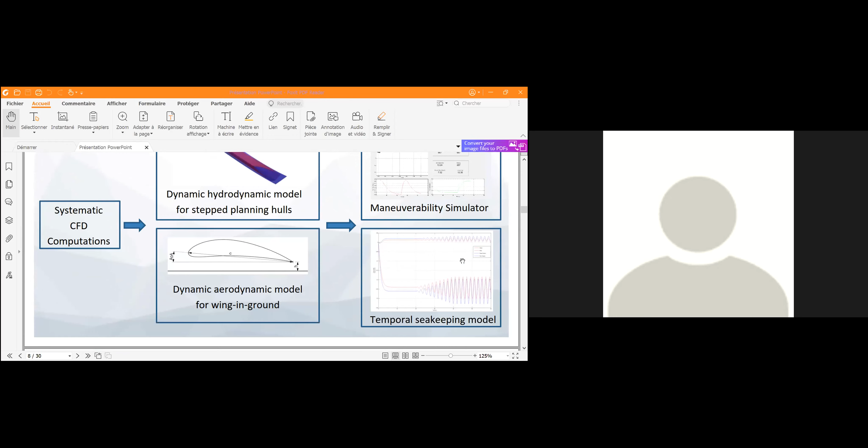We also worked a lot on propulsion, because propulsion at high speed is a challenge. Most of the research has been carried out with numerical tools, a lot of CFD and mathematical modeling, to simulate maneuverability and also behavior in waves. So we couple the hydrodynamic model with the aerodynamic model of the wing and ground effect to end up with the seakeeping model of the vessel. We can see that the damping from the aerodynamic part is very strong, and everything happens as if the boat were much larger than it actually is.

So in 2015, the first sea trials of the prototype, a 10-meter boat with 2 outboards, which we used in order to directly measure the thrust and thus the drag of the vessel in real time, so we could compare with simulations and validate the numerical tools we use for all the vessels we design.

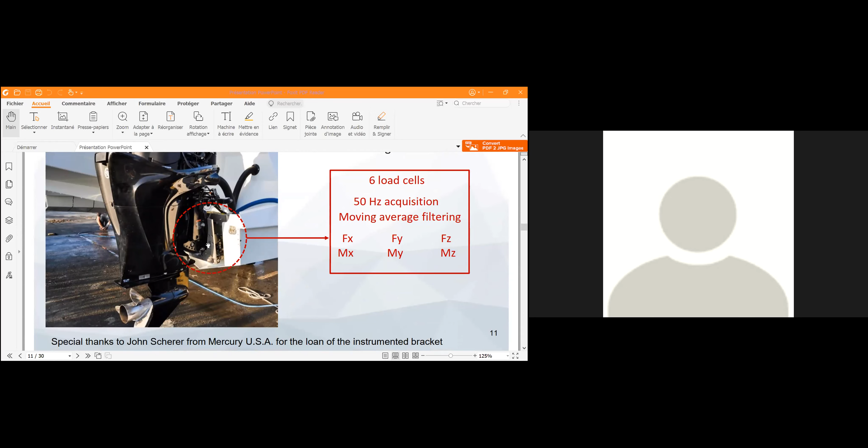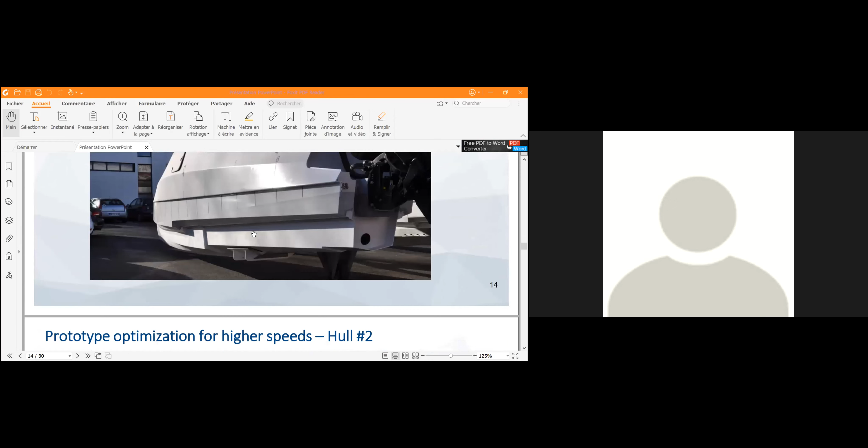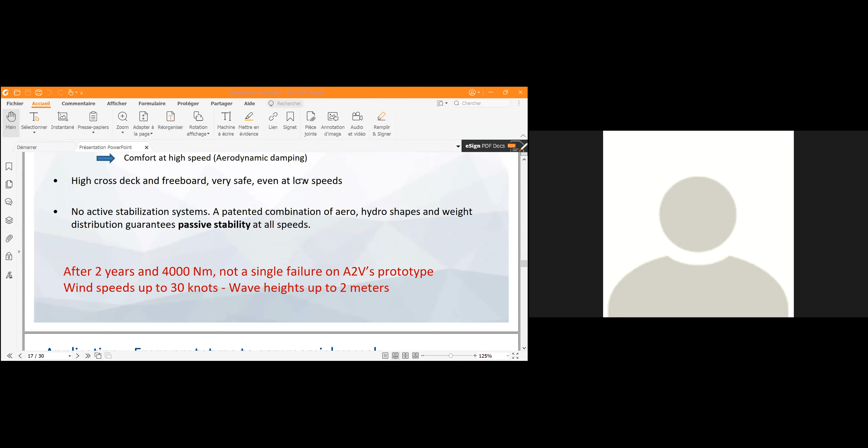And so as expected, we had a little bit less efficiency at 25, 30 knots, but above 45 knots the efficiency is increased, reaching 10 at 45 knots. So this is the maneuverability at high speed, which is really good also. And for 2 years, we've sailed more than 4,000 nautical miles without any problems on the vessel. So it's really reliable and safe with wave height up to 2 meters.

So we have a yard where we build. This is a 16-meter crew boat, which is now operating in Gabon. 25 passengers, 40 knot cruising speed, 45 knot top speed. This is the inside. Everybody is facing forward, just 3 rows of seats, so it's like a movie. So no seasickness and very comfortable to see forward.

And this is a typical comparison with a conventional, existing crew boat. With the same power, we go almost twice the speed, so the fuel consumption is half, basically. So it's $500,000 fuel savings per year per vessel.

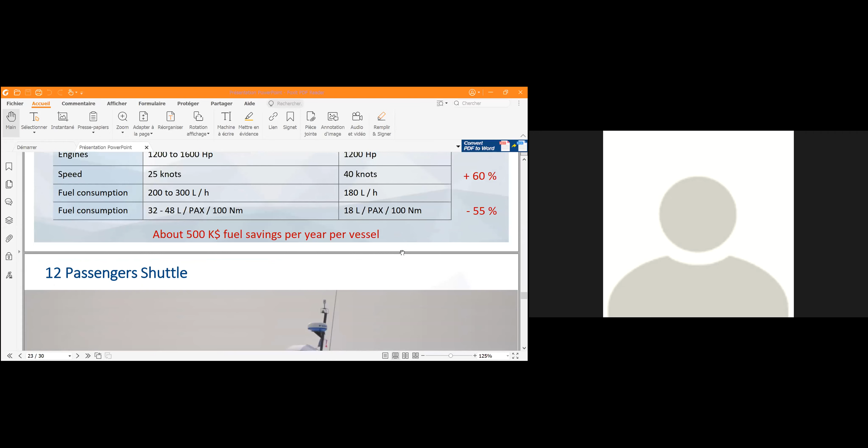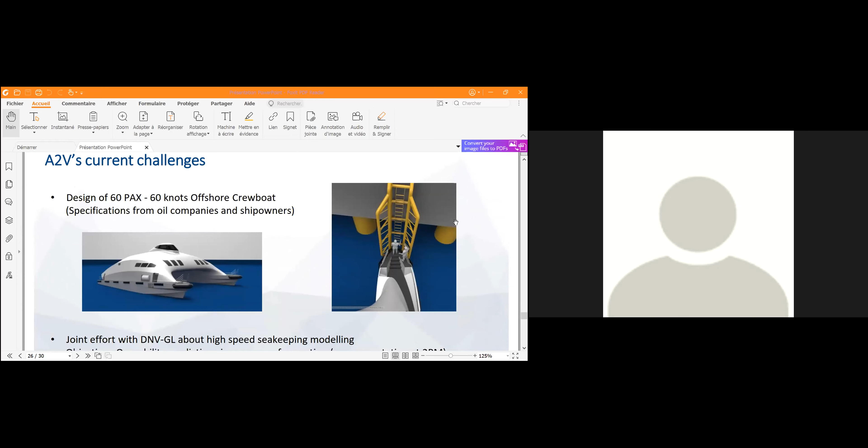This is a 12-passenger shuttle we built for Monaco this year. Again, a comparison. The smaller the boat, the more extreme the fuel reduction. Typically we go from 40 liters per pax per 100 nautical miles down to 16 on this vessel, and going faster. We are now working on larger crew boats for West Africa or Asia.

And the fuel costs are also largely reduced. Typically, it's cost per mile per passenger compared with a helicopter. A helicopter is rented every hour, so the total cost is about $7 per nautical mile. Existing crew boats are between 2.5 and 1.5, depending on how many nautical miles you do in the journey, but typically it's about 1.5.

And with the A2V, you can reduce this overall cost, the boat plus the fuel costs. If you have the same boat costs, the fuel costs will reduce the cost per passenger down to 1, and even less if you use the boat to do 400 nautical miles. You can go lower than $1 per pax per nautical mile. So it's between 5 and 7 times cheaper than the helicopter, and 2 times cheaper than existing vessels. Overall cost to transport people on platforms.